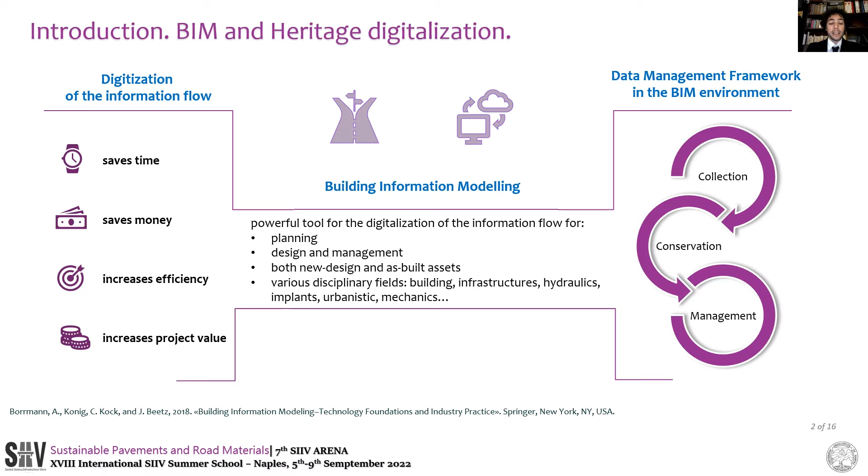This approach allows for the digitalization of information flow, saving time and money, increasing efficiency of the processes, and enhancing the value of projects. This research explores the suitability of BIM and digitalization tools for stone-paved roads as a powerful means of data collection, conservation, and management.

The proposed workflow is based on 3 phases. In the data collection phase, surveying operations are carried out concerning geometry by means of LiDAR technologies or photos, and other data obtained by different on-site instrumental surveys.

In the second phase, data are processed from laser scanners, point clouds are obtained, but also by applying photogrammetry to the photos. Moreover, all data acquired can be processed for numerical analysis. Finally, the building information model can be generated.

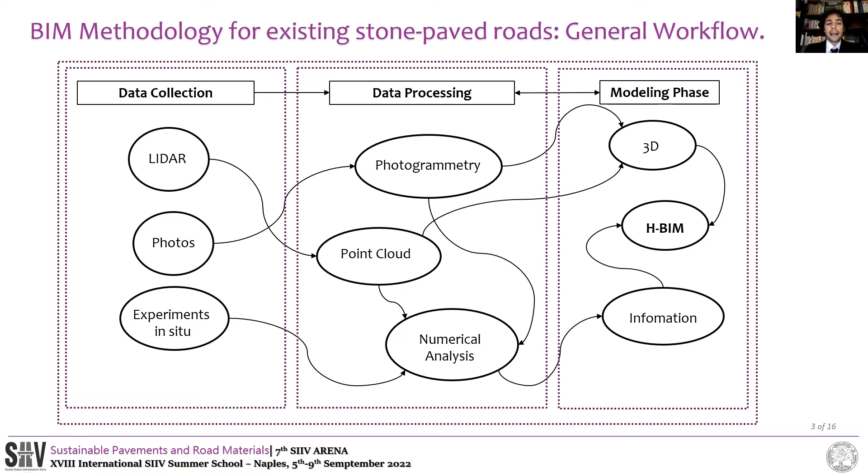The methodology was tested on the first case study, dealing with a stone pavement road open to vehicular traffic, namely Via Duomo, a landmark for tradition and tourism in the city of Naples.

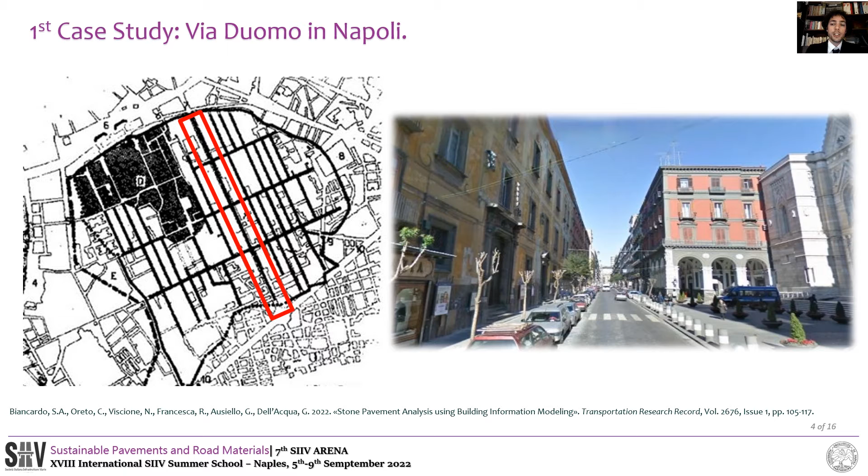The workflow can be summarized as follows. Starting from a photographic site survey, meshes were generated, which were then transformed into parametric 3D objects. InfraWorks was used for the topographic modeling, then Civil 3D for the road corridors, and finally Revit for processing the objects to be added to the road 3D solid.

Dynamo, an extension of both Revit and Civil 3D, was used for the creation of meshes from the photographic survey and the creation of objects in Revit by means of Revit's so-called families. The mentioned software exploits the graph theory to build scripts in form of nodes and links. It is the so-called VPL, Visual Programming Language.

Taking as reference the article 'Proposal for a Catalogue of Stone Cube Road Paving in a Urban Context' by Cardone, Cerni, Colagrande and Virgili, considering the regulations in force and the structural characteristics of the materials taken into consideration, a library was structured with possible stone element paving alternatives.

Subsequently, another script was created, capable of searching for an optimal solution based on the required constraints and design objectives, extracting the parameters contained in the model of the selected solution, and performing the appropriate checks of the stress-strain conditions.

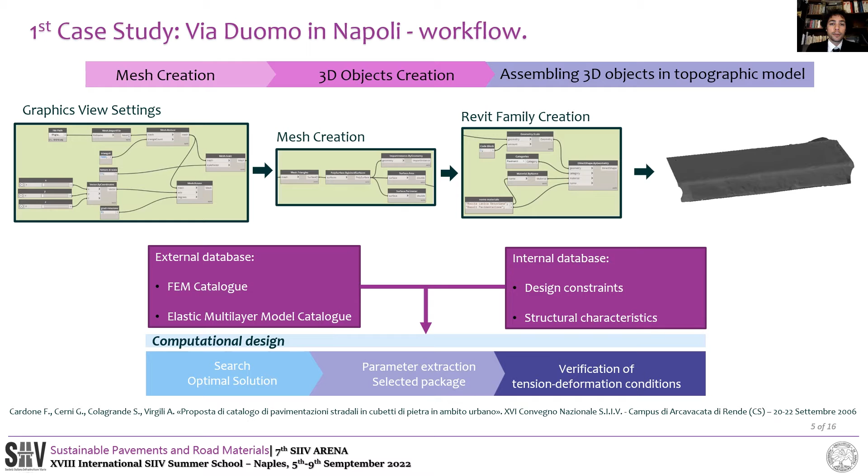Surface data were acquired from more than 1,000 photos. First of all, the element under study must always be photographed from the same distance by describing 3 imaginary circumferences around the element: one at street level, one at mid-height to have a 45 degree angle, one at the top to capture the element almost orthogonally.

To ensure continuity of volume, the triangular light areas generated by the frames must overlap by 70%. As for the number of frames, a minimum of 20 frames per single element will be required for the virtual reconstruction software to start, that is Autodesk ReCap Photo, and homogeneous lighting conditions are required too.

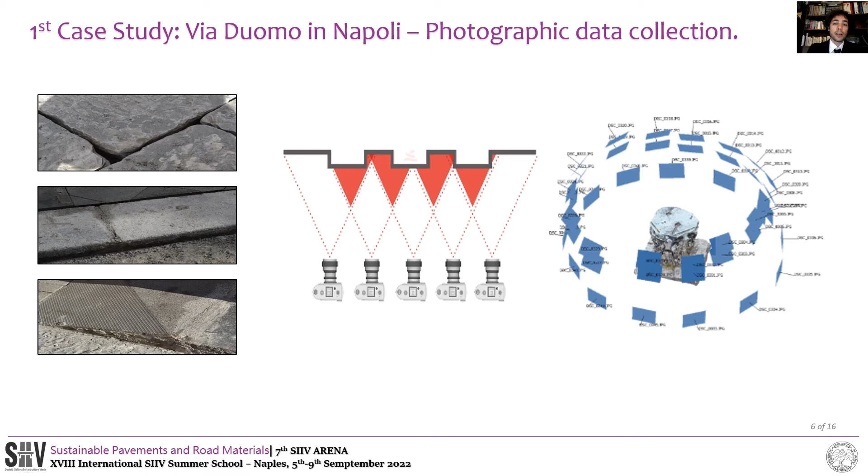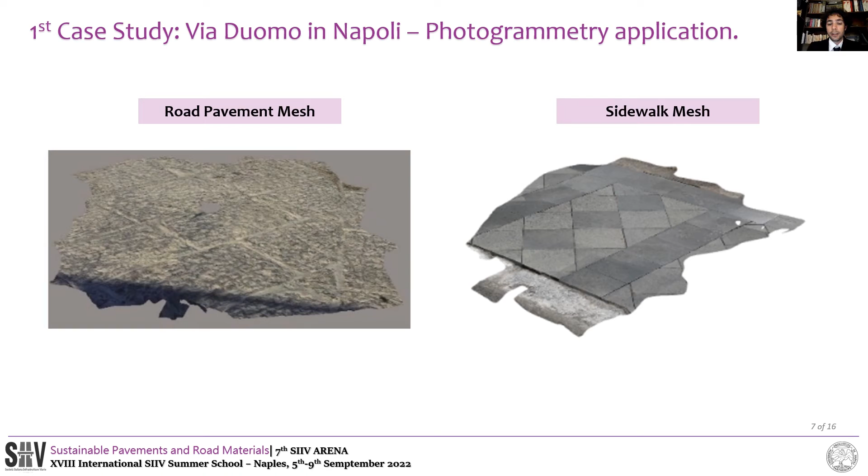The acquired data were processed to produce and manually edit the meshes, obtaining objects for the road pave, the sidewalk, and the curbs. The 3D meshes were processed through Dynamo to become Revit objects that, as end result, bring all the properties of both structural and stress-strain characteristics.

Thus, from poor graphic solids, they have been turned into parametric entities consistent not only with initial design objectives, but also with the BIM methodology.

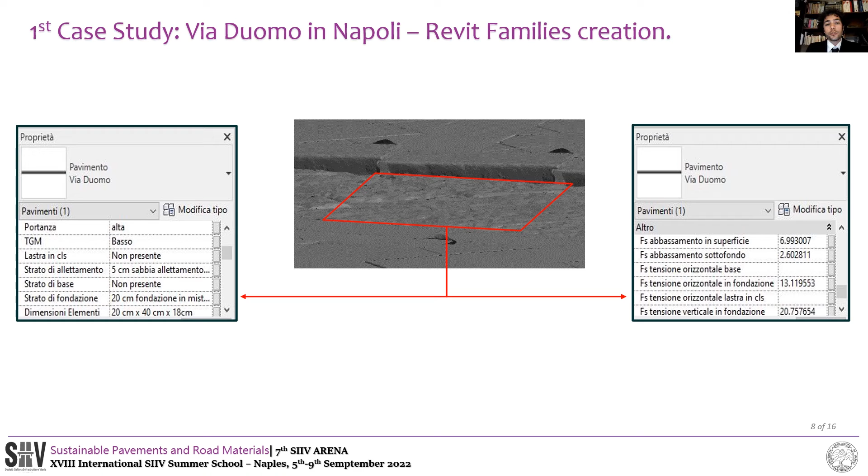The second case study focuses on the analysis of the paving surface of a stretch of the ancient Via Domiziana under the archway of the Arco Felice, a monumental gateway to the city of Cuma, near Pozzuoli. Today, the road is open to vehicular traffic, and although it is marked as an archaeological artifact of historical and cultural interest, very little attention is paid to preserving the pavement.

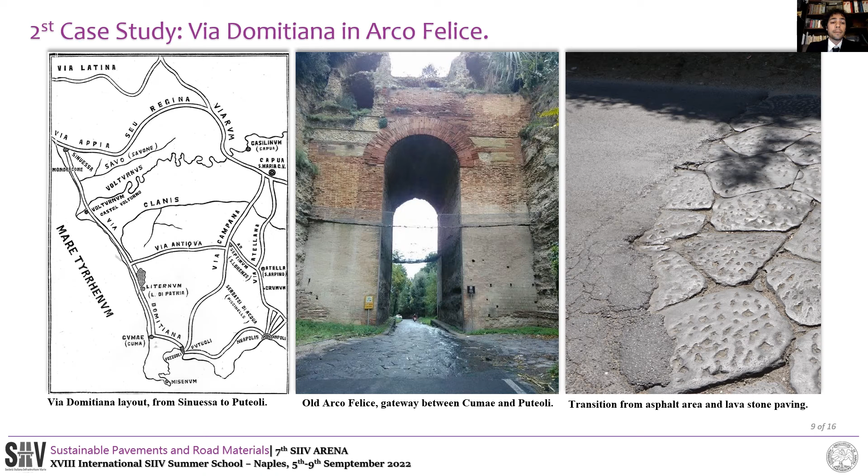Indeed, the research team went to the site for inspection and noted a partial overlapping of asphalt over paving lava slabs. The British pendulum test was performed according to the European standards to experimentally measure the surface friction. The test was carried out on 6 points, chosen along a probable trajectory of the tires of passing vehicles, 5 times per each point, and the mean is the pendulum test value, or PTV. Prior to testing, the points were cleared of fine debris and the surface slightly wetted.

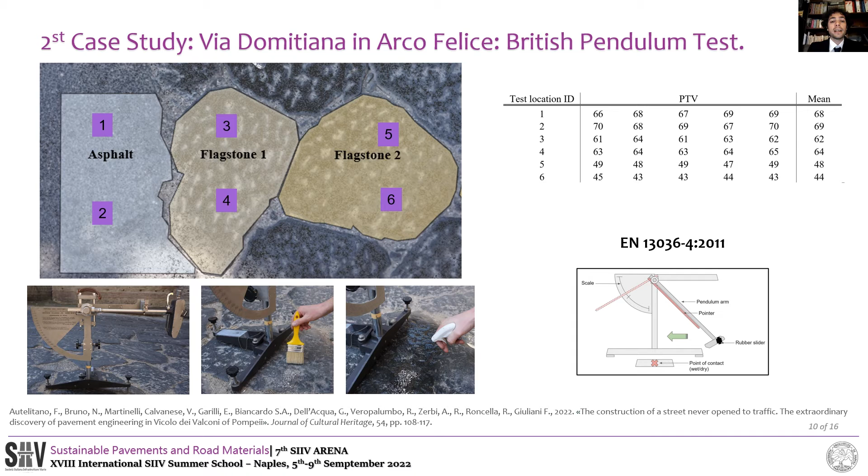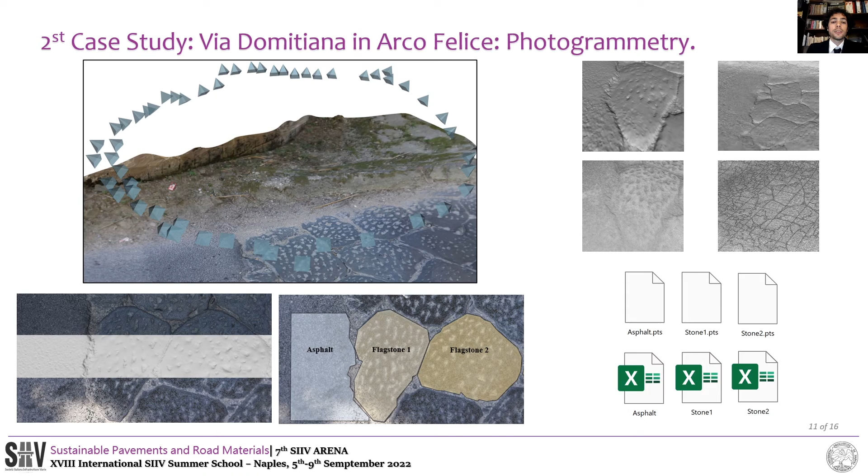At the same time, similarly as in the first case study, several photographs were taken around the strip on which the grip tests were carried out in order to apply the photogrammetry technique. Data were then processed, producing both meshes and point clouds. In a following phase, the digital model of the infrastructure was produced. Thus, as it exploits Bing map data, InfraWorks was used to produce the georiented model of the road, then imported in Civil 3D.

The cross-section was created using Subassembly Composer, a Civil 3D extension that allows for the creation of customized assemblies by means of a flowchart in which the constituent elements of the section, such as points, links, and surfaces, are related through the definition of logical geometric parameters. Then the solid 3D model of the road was created in Civil 3D, and properties have been added by means of the property sets. In this case, the results of the British pendulum test were entered, and at a later stage, the results of the morphological analysis performed on the point clouds too.

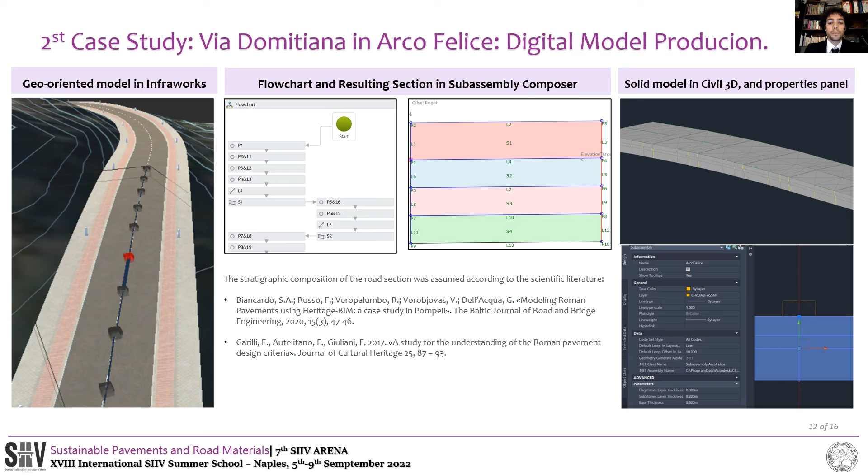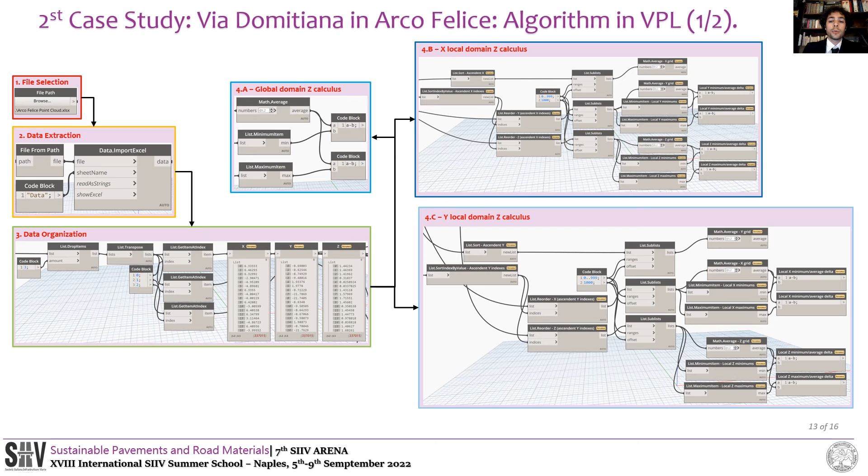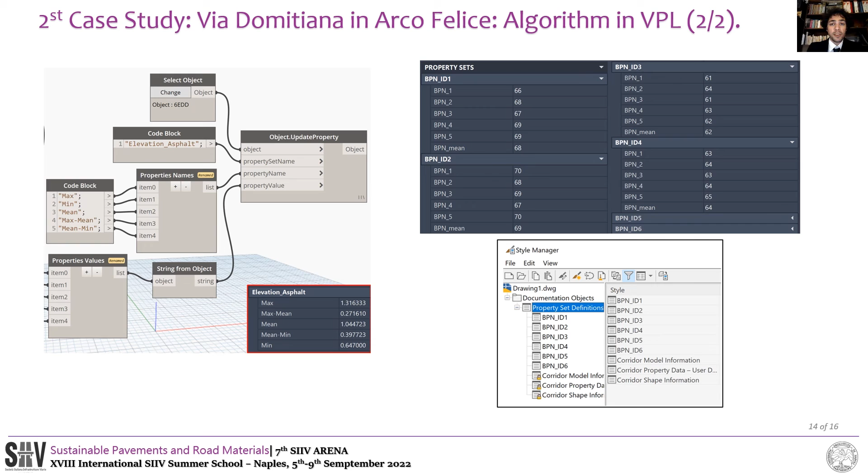Indeed, point cloud data were entered as input to an algorithm realized within Dynamo. Thus, a first node was used to select the Excel file containing the cloud data. Then data was extracted and subsequently organized, separating the coordinates in 3 separate lists. Finally, the calculation of the parameters was performed on the global domains of all elevations and on subdomains made of 1,000 points oriented according to increasing x's and increasing y's respectively. The calculated parameters were entered into the digital model by creating a specific script for the updating of the property sets.

So, in light of what was presented, some considerations can be made. The integration of detailed graphical reproduction techniques such as photogrammetry, advanced geometrical surveying technologies such as LIDAR, and BIM methodology is advisable for the digital reproduction of infrastructural assets. The obtained results highlight the possibility of the development of a tool suitable for information management through a complete digital model and the added value of the use of Dynamo that can implement process automation for better performing models.

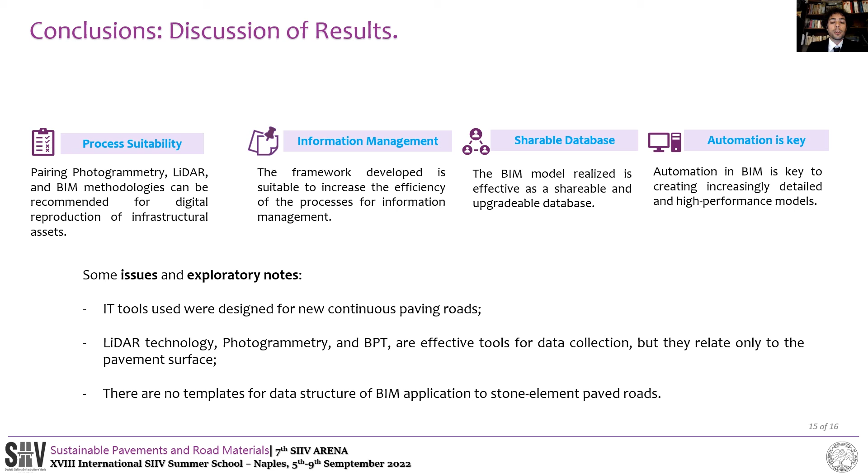A first limitation of this research lies in the computer tools used, which are designed for new continuous paving roads. Thus, the BIM models produced are mostly conceptual, since the research team had to adapt to the capabilities of the currently available commercial software. Still, the models are useful as databases, shareable and updatable. Based on the above, future research should consolidate and extend workflows that implement process automation within models. Furthermore, it will be crucial to develop software dedicated to the application of BIM methodology to stone element paved roads, as well as to extend BIM standards regarding the structure of data contained in models. Finally, other data collection techniques should be investigated to extend the quality and quantity of collected data.